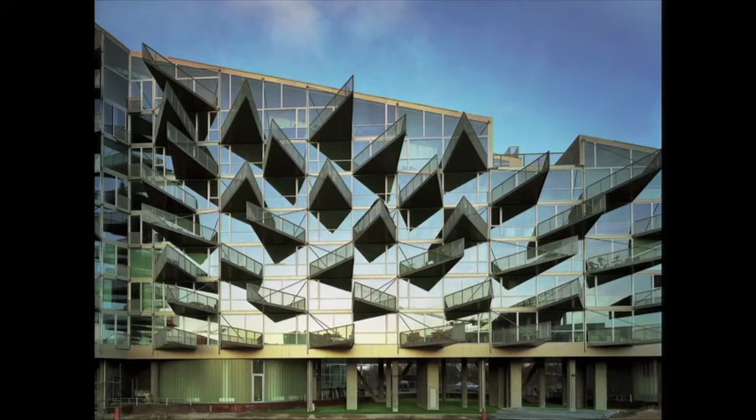The VM houses is the first example of actually cheap housing that we based a lot of our office on for the first couple of years. Then we did the mountains, which was basically this stack of 80 penthouse apartments on top of a parking house. We spent, you could say, the first 6 years since 2001 until '07 constructing quite profane buildings in a Copenhagen context.

Here's the 8 house. And then around 6 years later, we started our office in New York. We moved 4 people to New York to work on a specific project where we found that the distance was too long to do it out of Copenhagen. Then it went quite fast, and now we just turned 200 people in New York.

One of the projects that we started in New York is working for Google, which has now asked us to do their headquarters in London. So now we also have 20 people in London. We just turned 400 here a couple of days ago.

And the New York office, with its 200 people, just finished the first building, which is quite insane, that you are actually working on 50 different projects at the same time as your first building is getting realized. This is testament to that in architecture it's, you could say, a gentleman's sport, an old man's game where you become increasingly better at it the older you get. And a lot of people don't get to build before they turn at least my age.

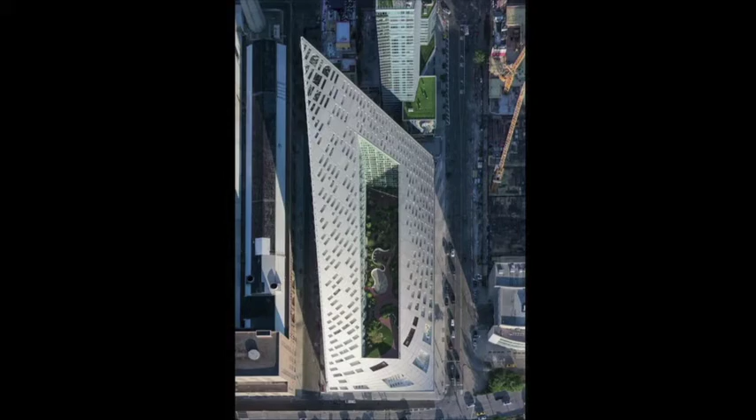So the VIA, or the West 57th, as it was used to be called, is basically a courtyard building where all the apartments have this fantastic view over the courtyard and onto the Hudson River. It's in many ways constructed in the same way as we built in Denmark, out of prefabricated concrete elements, not a steel building like the one we're sitting in. It's probably steel and concrete here, but...

And the second building that is just about to be finished, that we're doing right now, is the complete opposite. It's in Miami. It's also housing, but it's all cast on site because of the cheap labor that comes from Mexico over the borders. In Florida, almost all concrete gets cast on site, which allows you to work with a completely different structural system.

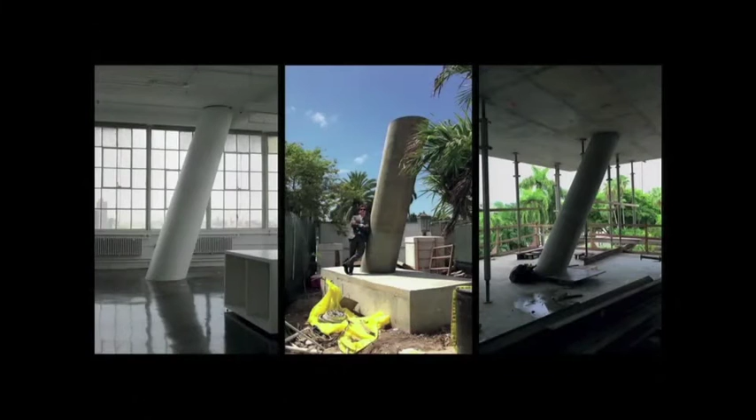Basically, we are working with these twisted, or at least tilting, columns that give a quite unique experience into each apartment. You could say the New York project is basically rental apartments, whereas these are for sale. They're quite big. I think the biggest ones are like 300 square meters, so really large, and the cantilever from the column to the edge...

I don't know if I can walk out here, but... I probably can't. I'm gonna stay here.

...is more than 5 meters. So it's a completely different structural setting than the one that we have been growing up with in Denmark. And speaking of in situ cast concrete, I'm gonna go on to the project that I'm mostly here to talk about, the Maritime Museum.

So the Maritime Museum is basically a transformation project, transforming a city that used to be and has always been a harbor city, a harbor city that has gone through, you could say, two main identities. The first identity was the castle Kronborg, famous for being kind of the home of Hamlet by Shakespeare.

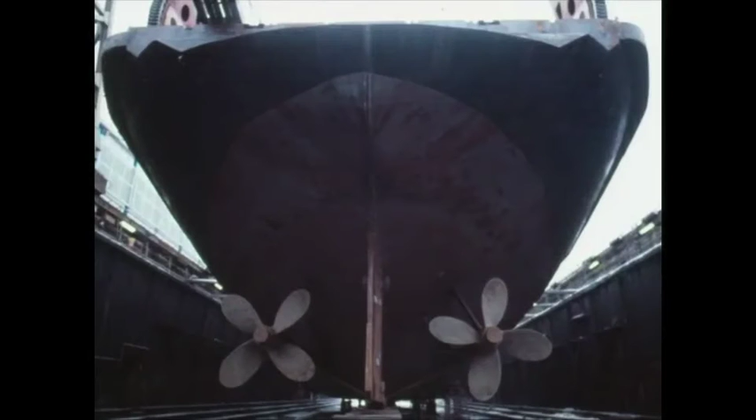It was actually a dock constructed around an older dock. The older dock was made out of granite, and they basically dug around the old dock while they still used it, then built a concrete structure around the old stone dock, and tore it down afterwards, which in many ways resembles what we ended up doing for our proposal for the museum. A lot of famous Danish ships have been built in this wharf and in this particular dock.

But when we came up there, the dock was filled with water. It had actually been filled with water for more than 20 years and had not been emptied, so we had no idea what the state of the concrete and of the dock itself was.

We went for a walk around it and tried to imagine the space we were supposed to create down there. You could say the only people who actually knew how the dock looked were the firemen, because they'd thrown in a couple of cars and put dolls inside them so they could swim down and practice rescuing human beings if they were about to drown inside a car. We didn't have a diver's license or equipment with us, so we had to use our imagination.

And we started working on the competition, reading the brief. Often when you work on competitions, what you do is read the brief very carefully. And what the brief said was that we were not allowed to build as much as a meter out of the dock. We basically had to put the museum inside the dock, put in some skylights, and the reason for that was because it was within Kronborg's 500 meter radius, which was listed by UNESCO.

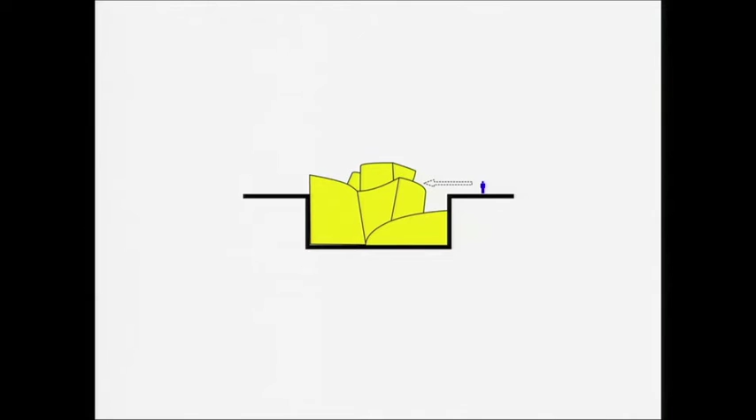After that, the next range of questions that we asked ourselves was, how do we actually preserve the historical dock? One of the things that was very obvious was that the dock was both cold and wet. There was actually water leaking through the walls when you would empty it, because there was just water outside on the other side of the walls, and it was cold. So you had to insulate it in order to use it. And by insulating it, you would take away the texture of the historical dock, leaving it pretty stupid to preserve it in the first place.

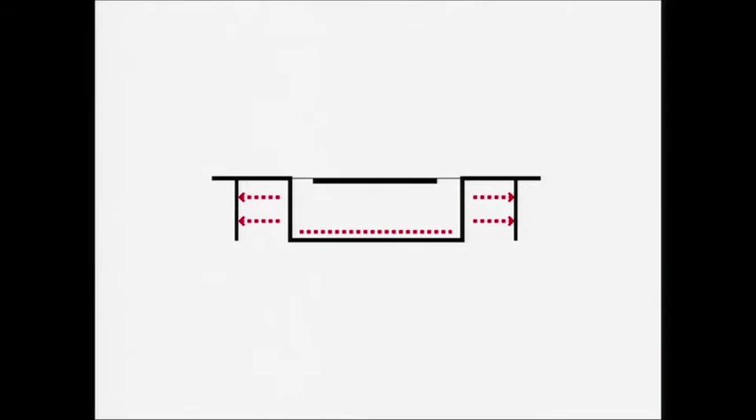So we thought, okay, maybe what we should do was actually to insulate it on the outside. And we discussed it with the engineers and came up with the only plausible solution, which was to hammer down a sheet wall, steel wall around the dock, and then dig it out, pump it dry from water, insulate it on the outside, put in earth anchors to hold the wall back, and then put it in the dirt, and then we could kind of change the surface of the walls on the inside. And we thought maybe that was quite a lot of effort to go through just in order to change the texture of a basement wall, which it basically was.

But then we got the idea of saying, if we anyway have to dig all the way around the museum, why not put the functions out there, liberating the dock from functionality and program, and actually turning the dock into the icon, the hidden underground icon, and in a way preserving the history of the Maritime Museum, the dock itself. So that's how we arrived at the project, that basically you could say took the question that was asked us by the competition organizers, and turned it inside out and just added in 3 bridges.

The first bridge in the middle is called the Kronborg Bridge. It's the main access for all the people going to Kronborg, which is one of the main tourist attractions in Denmark. It has close to 1 million people coming every year. And this was also, you could say, a highway bridge because cars had to pass on it. So it was a quite heavy bridge, and it was defined to be 13 meters wide and exactly placed where it's placed in the local plan, and that couldn't be changed.

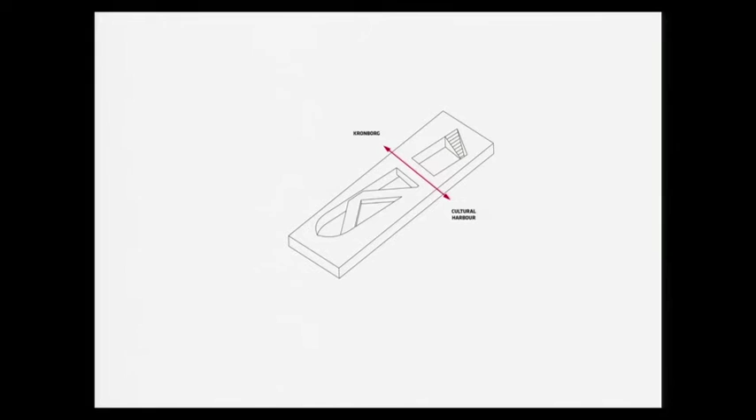The next bridge is the harbor bridge. The harbor bridge is the one that kind of holds the water out of the museum, and at the same time it provides a harbor promenade that is 8 meters wide and a possibility for a fire truck to go out on the bridge, which defines the width on the other side. So that was also completely defined by the local plan.

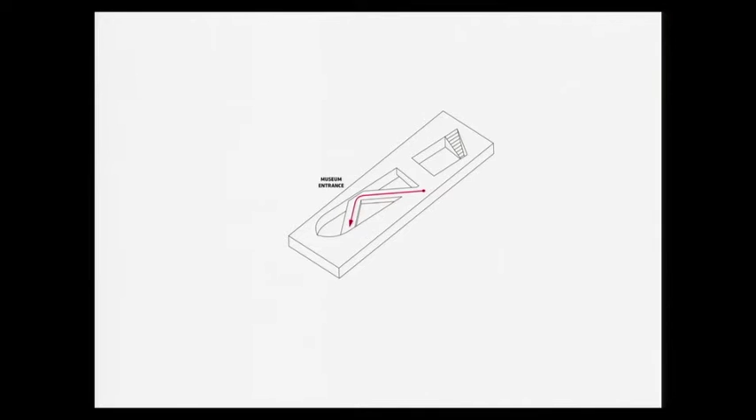The only bridge that we actually added was the main entrance, which we call the zigzag bridge. That had to be 1 to 25 in order to fulfill the Danish regulations for disabled and handicapped people. And there was no room in the dock. It was simply too long. It had to be 80 meters long. So in order to get it down into the dock, we basically had to bend it in the middle and push it down into the dock, which then performs as the main entrance and leads you into the museum.

Underneath all these 3 urban bridges, we then put in the functions that either should be visible from the city by being, for instance, the changing exhibitions, so that they actually become like a vitrine for the exhibitions that change running, or the cafe which needs more daylight and more access to the dock.

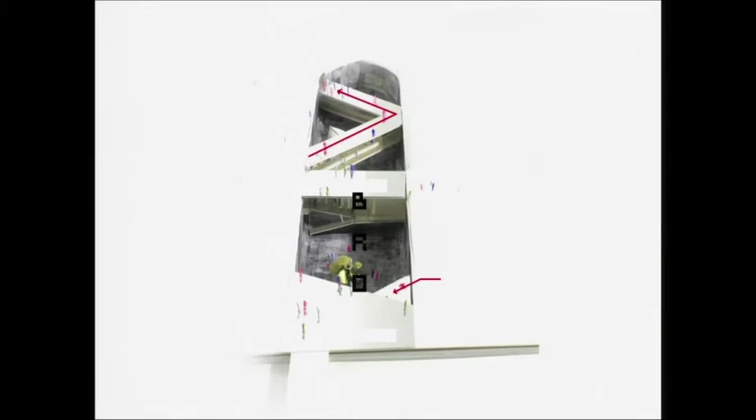When you enter the museum, the rest of the floor is also a tilting surface. It leads you all the way around the dock and down to the level of the bottom, but it's 300 meters long, so it's so shallow that you hardly feel it. It's more like walking on a plain surface that just tilts enough for you to barely recognize it. It more feels like the space just slowly expands.

And you could say, in order not to create 2 long corridors on each side of the museum, we shifted the orientation of the outer white box around the museum, so that the dock is 90 degrees to the shoreline that was there in the industrialization in the 19th century, and our building is 90 degrees to the historical waterfront that was there in the 15th century and the one that's there now.

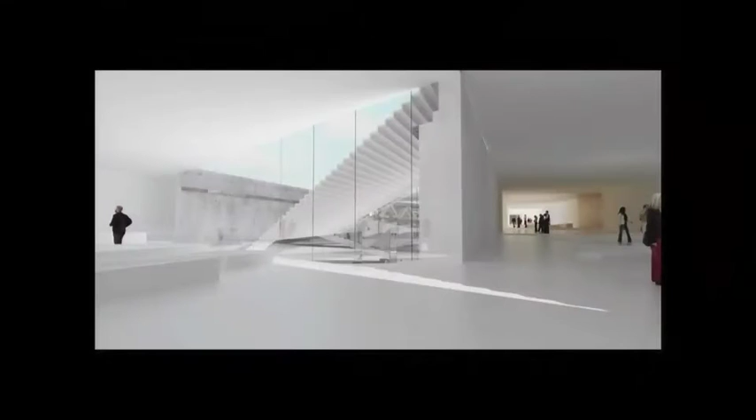So it's basically the inherited discrepancies in the development of the harbor area from different epochs that defines the geometry of the museum and turns it into these expanding spaces. Underneath the first part of the ramp, we added the administration offices for the museum. What you see to the right is a 150 meter long space that becomes more and more narrow.

Back in the 15th century, when architects and painters discovered the art of drawing perspective, they started working with non-parallel walls or columns in order to emphasize the feeling of grandeur for the emperor. When you walked up through the hallway towards him, he would look bigger. And that's exactly what happens here.

So the space that you see to the right almost looks infinitely long, but when you look at it from the other end, it looks less than half as long because the walls are expanding. This helps break up the monotony of walking around the dock, because the space is constantly expanding and contracting as you walk around. When you get to the end, on the level of the bottom of the dock, a big grandiose staircase warps up and leads you back up onto the entry.

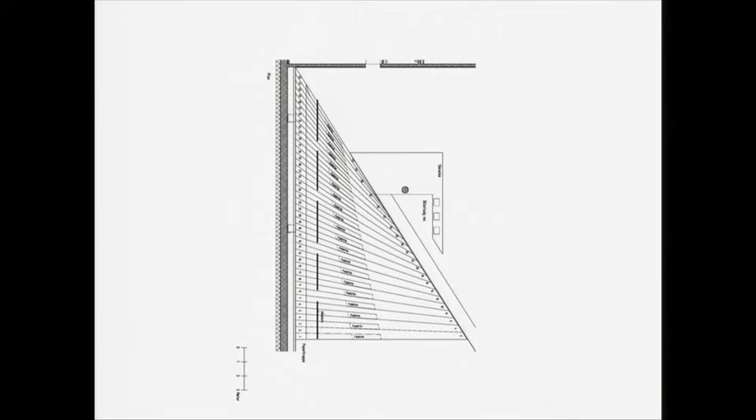Basically, the bottom step follows the bottom floor, and the top step follows the top floor. The top one even tilts in order to meet the ramp, so it actually tilts 1 to 25 to the side, whereas the bottom one is straight, which was quite hard to draw back when you only had 2D drawings. We did this project mostly in 2D.

The steps are made out of concrete as the rest of the floor, and the sides of them out of aluminum as the bridges are.

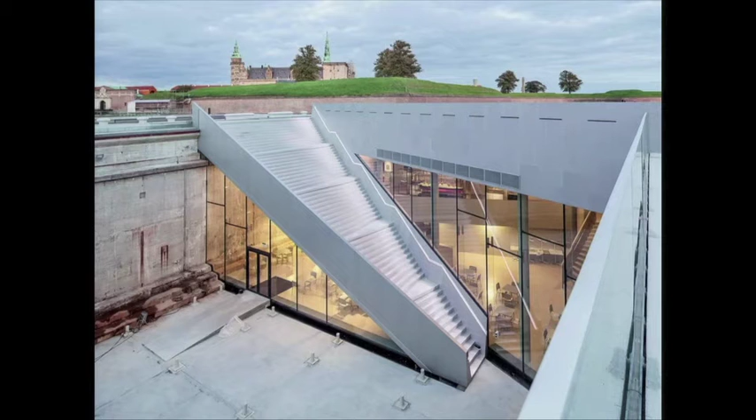This is the cafe, which hosts the other big staircase in the project. This staircase is much more functional because it's actually the fire escape for all the people. If there's a fire, everybody runs out into the dock and then has to run up the staircase. So this staircase needed landings, but the problem was the dock was not wide enough to contain a staircase with landings.

We found out that if we took one of the sides and made straight steps, then on the other side, because it was on the diagonal, that side actually became longer, and there was room for landings there. So basically, the two sides of the staircase have either the fast route up on one side, or the slower route for people that need a break on the way.

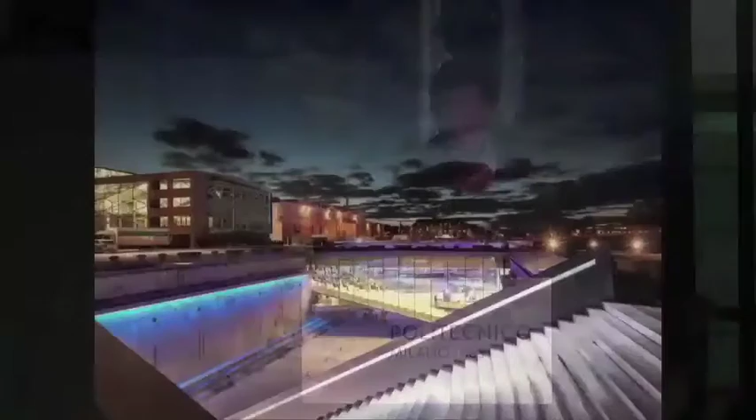There's light integrated into the railings to emphasize the difference between the two sides, but also, of course, to provide light onto the staircase if there's a need for fire escape.

One of the main details of the project is, of course, the cut between the glass and the concrete. The concrete walls are more than 1.5 meters thick, and cutting through them is quite difficult. You have to cut with either diamond wires or big diamond cutters. And the precision of something like that is not as great as you would hope for.

The funny thing is that normally, for us, the precision between the glass and the concrete was the most important part of the entire architectural project. At the same time, the people that normally tear down things in the building industry are kind of the lowest part of the hierarchy.

They basically just put something over their ears and start hammering away. And if you tell them that they have to hit a tolerance of plus minus 5 millimeters, they will look at you, probably smoke a joint, and just go back to work and hammer down everything. So for us to actually carry it through, we had to spend a lot of time on site explaining to some workers that normally don't get the privilege of understanding the architecture of the project they're working on, to make them understand that they were actually our most trusted workers on the site.

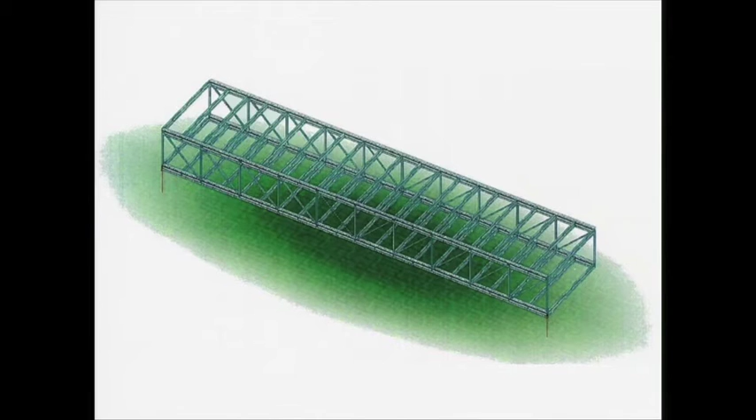You had a completely undisturbed view of the historical setting, instead of a lot of structure in the facade. First, when we started working with the engineers, they came back with a structure that looked like this, which would have completely blocked the view from inside to outside as you walk through the bridges. So we asked them to look at Vierendeel trusses instead, but they just got even bigger.

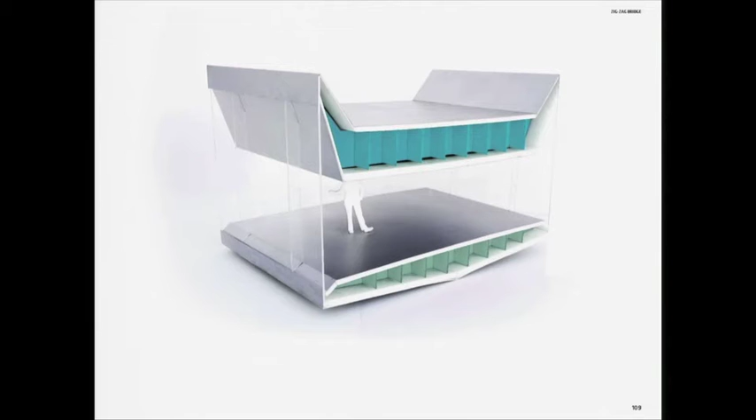But the moment you put on the lid, it's very stable, and that's basically how the entire structure works. On the top part, it's a solid piece of 4 centimeter steel. On the lower parts, it's a solid piece of 2 centimeter steel. In between, it's quite thin, but a lot of ribs actually turn it into this box girder.

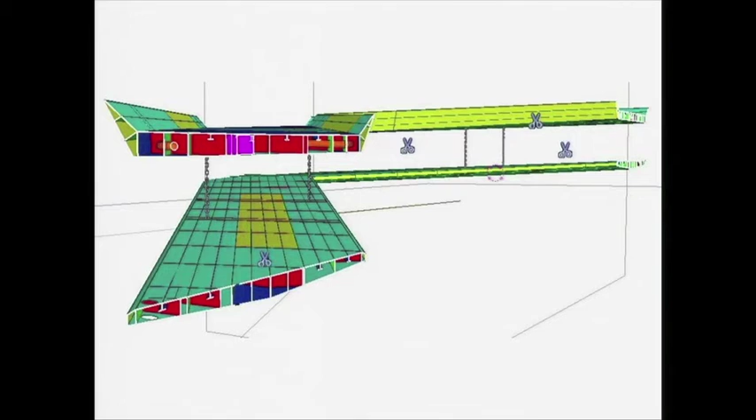Suddenly we were able to span 35 meters. Normally, the thumb rule is that for each 10 meters you span, you need 1 meter of height on the beam, so for 35 meters it would need to be 3.5 meters. We ended up getting the lower bridge down to just 60 centimeters, even though it had to span 35 meters. The top one has help from the 'ears,' basically, that go up on the side.

We call it the Batman bridge, the upper one. And the upper bridge, being a little stronger, helps its younger brother below by hanging it on the central points—basically halving the span, so that the lower bridge only spans 18 meters and 18 meters.

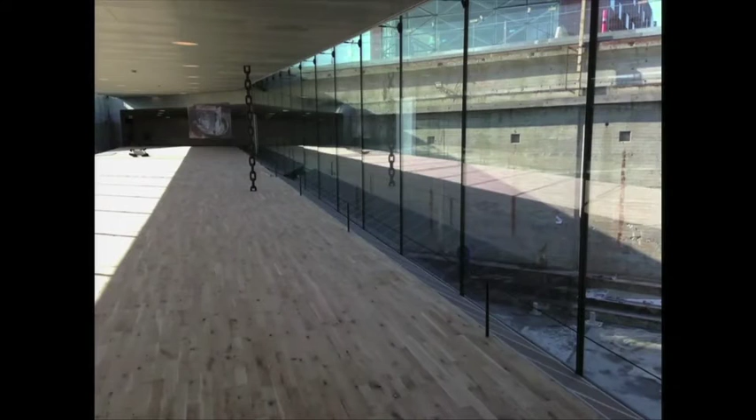This is the finished experience of the building, where you really see both the structure and the chains that we ended up using are very visible in the architecture, but also that you have this fantastic view of the historical dock, and really get an understanding of how it was used—because that's basically why we're doing this project. That's what we're celebrating.

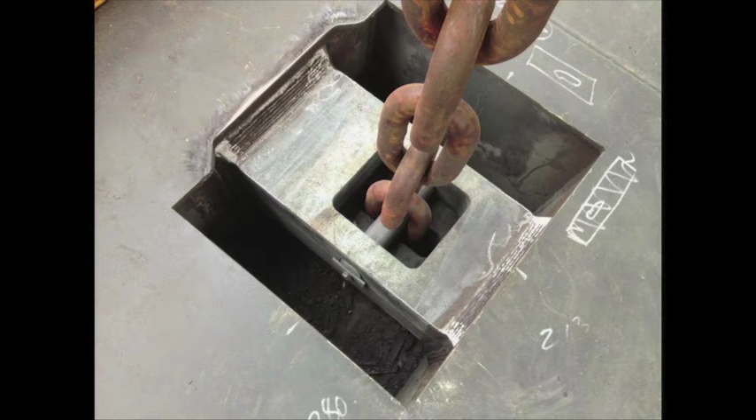The chain is a normal anchor chain from a boat, used instead of a tension rod, but it has the same properties. There are 4 of them hanging between the bridges, and each of the upper and lower bridges is supported on 6 points, whereas only 1 of them is held fixed in place.

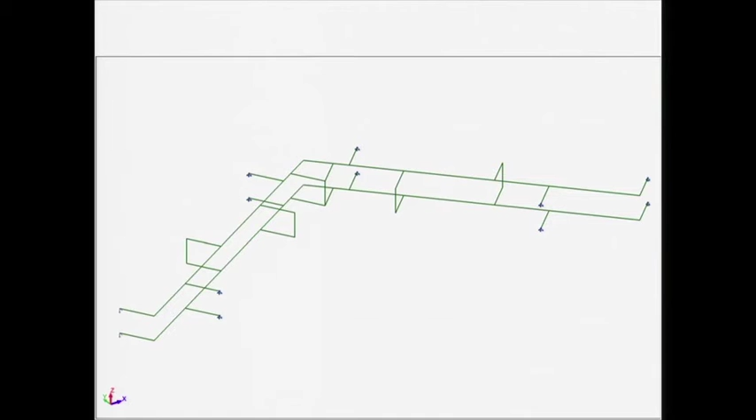The rest lie on joints that can move, which means that when people are walking on them, and when it's hot during the summer, they actually can move quite a lot—up to 10 centimeters, which is a lot when you have a bridge with a glass facade. So there were a lot of tolerances we had to build into the connection between the old concrete dock, which is extremely stiff, and these very soft, flexible bridges.

Inside the box girders, we added all the technical space. As you can see, there's very little insulation on the top and bottom, so it's really minimal, especially for Denmark. You don't use as much insulation down here, but in Denmark normally on a roof you have around 40 centimeters.

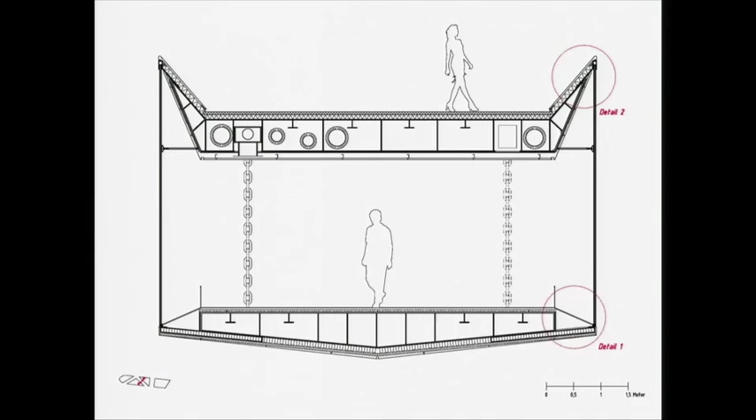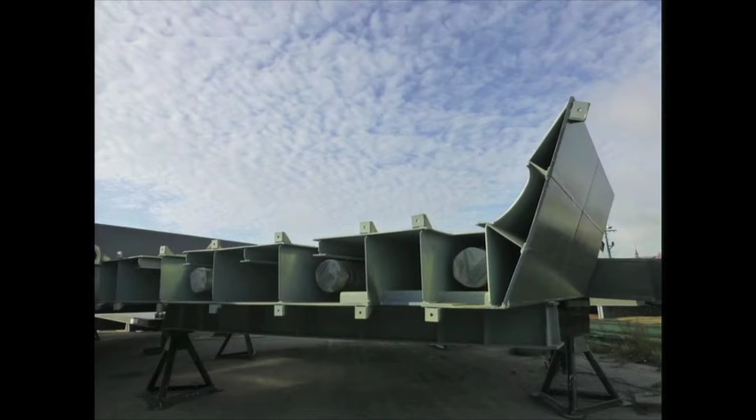But here we used high-grade insulation, so we got it down to about 10-15 centimeters instead. Inside the bridge, it's stuffed with mechanical ventilation, pipes, drainage, and electricity. So it really is a multifunctional steel case that performs both structurally and with all the different MEPs.

That was constructed on a ship wharf in China, which turned out to be the cheapest way of constructing it, and then lifted onto a ship, sailed over the ocean as part of this whole global process of constructing buildings in our time. Each of the pieces that were ready-made from China was up to 100 tons, and then they came to the Helsingør harbor as the biggest ships that had ever docked to the city, and got lifted off and put in place with less than 2 centimeters of tolerance.

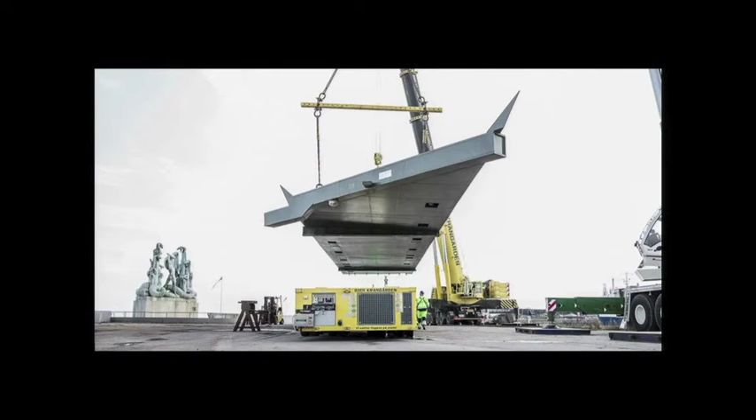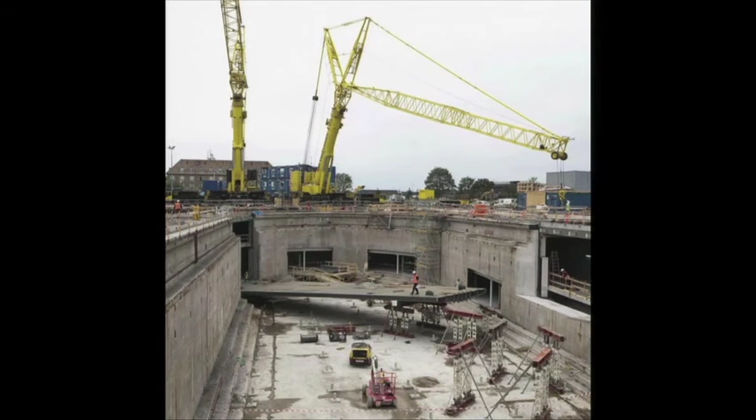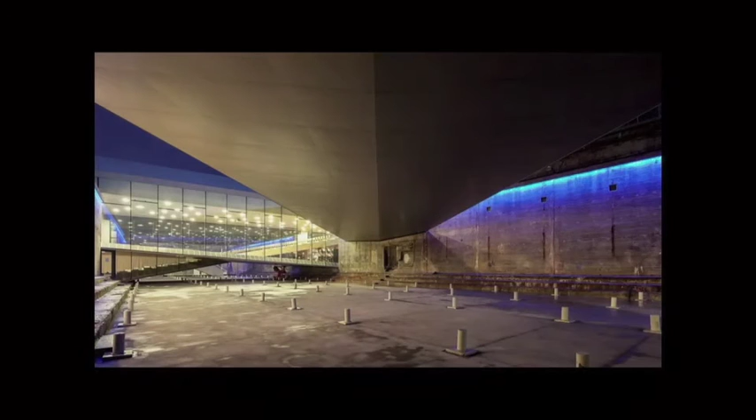So it was a very high-end construction job, and they fitted pretty okay, not as perfectly as we had wished. So we actually ended up doing a 3D scanning of the old dock, which had also moved quite a lot after we started working with it, and the steel, in order for us to do the finishes. So we did a 3D scan of the entire thing before we started cladding it, and had to basically redraw the entire cladding and the entire build-up to fit into the geometry that was needed.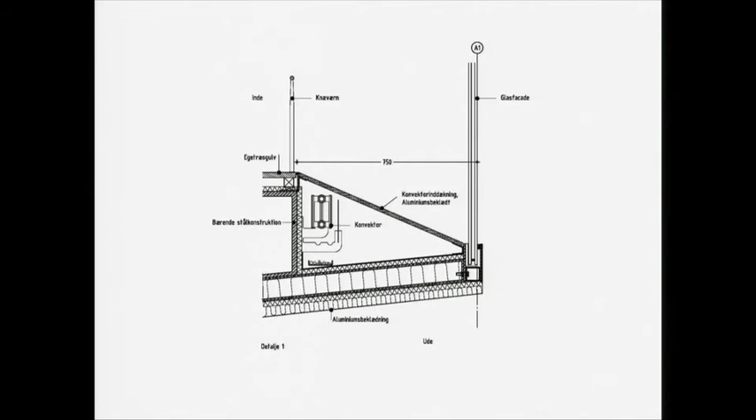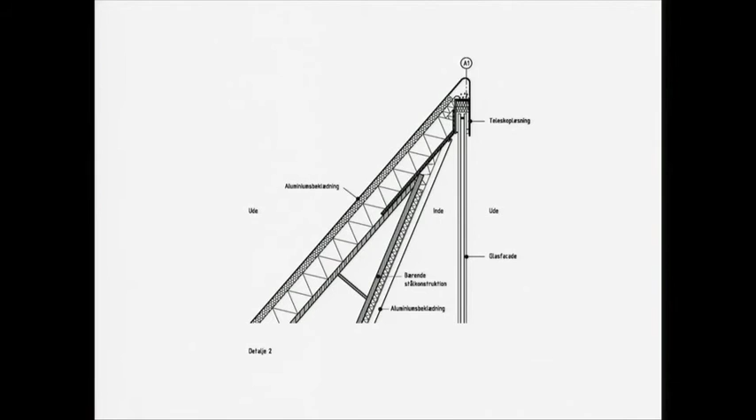But the main thing for us was to keep the edges of the bridges as precise and small as possible. So we really worked on getting the glass almost all the way down to the bottom of the steel. Basically, the construction steel stopped about 750 millimeters from the facade, and from then on it was just a small steel pin that holds the glass. On the top it goes up, but because of the dilatation and movement of the bridges, the glass can move up and down 10 centimeters, which is also a big part of the technical solution.

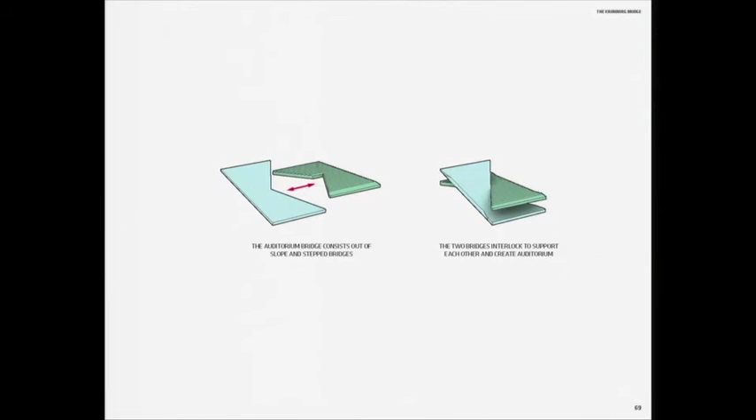The next bridge I'm going to talk about is the Kronborg Bridge. The Kronborg Bridge is what we call it at the top, where it's a concrete bridge, because that's a highway bridge where big cars go. Then we have the two lower bridges, which we call the Auditorium staircase and the museum ramp. Those two bridges are basically the entire width of 13 meters at each end, but then they pull back in order to allow the other bridge to go around it, and then interlock, forming an arch.

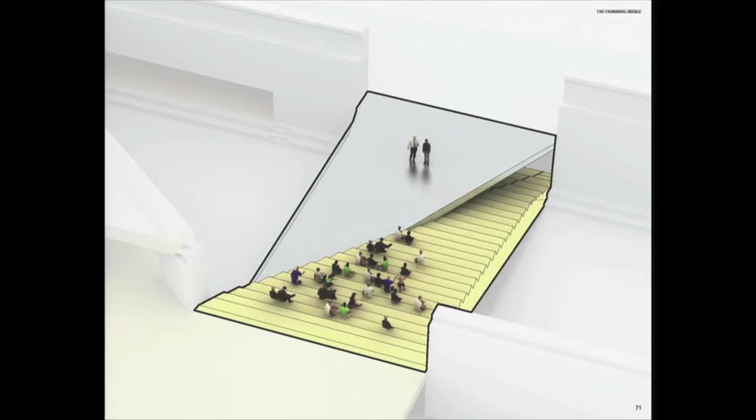And basically they support each other. So instead of it being one plane that is very soft in the middle, they actually interlock and become much more stiff. This made it possible to get the steel down to between 20 and 40 centimeters in the construction. One of them is used for the auditorium, and the other is a shortcut from one side of the museum to the other.

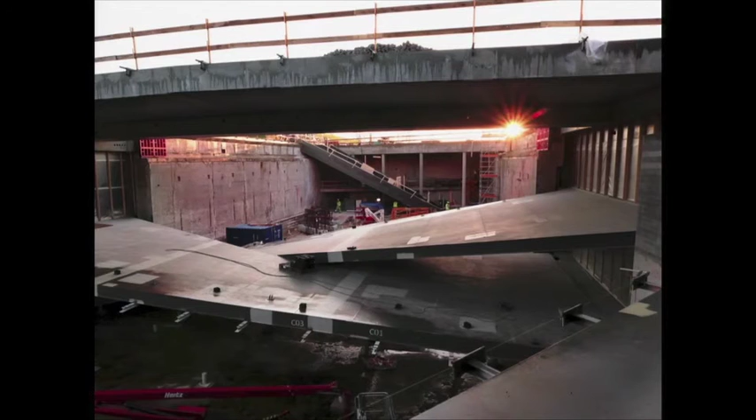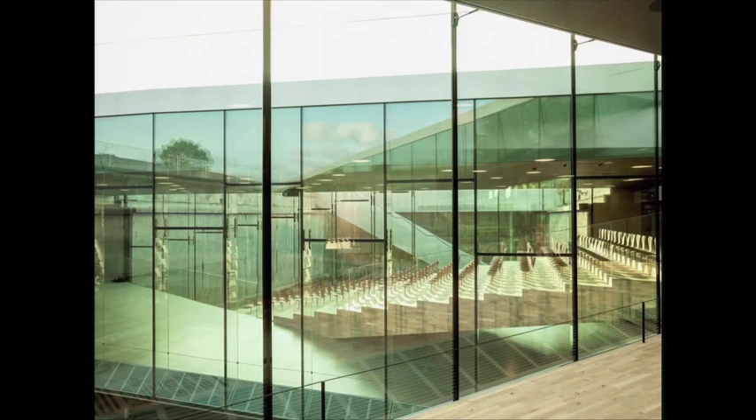Here you see the technical drawings of it, and here in their most pure form, you can really experience that it is actually two different structural systems, but almost three different independent bridges that span the dock, which really helps create a space that is very transparent and where you really feel the length of the dock. The dock is 150 meters long, 20 meters wide, and 8 meters tall, and in that way it's probably the biggest exhibition piece in any museum in the world, because it's actually exhibited within the museum.

The auditorium is capable of holding around 150 people, and the bridge for the shortcut is actually used a lot by children to play on, just as a kind of informal playground.

This is, let me see if I can start it.

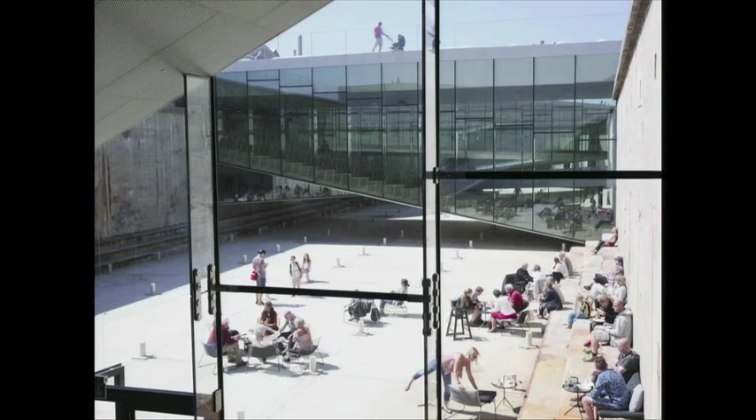This is a typical day at the Maritime Museum, where it's filled with life. Actually, the parts of the museum that are not programmed are often the most lively ones, both here on the inside, but also the dock is quite filled with people. There's hardly any wind down there because of the shelter of the walls around it, and it's used by the cafe for outdoor serving.

But it's also used for events during the year, operas, theater shows, where it can be enjoyed both from putting up chairs in the dock itself, but also from the edge of the dock on a normal day where people are just enjoying the dock itself. But on big event days, people actually gather all the way around the museum in the urban landscape, on the ground floor and on top, to see what happens within the dock. So it has actually become this almost sunken square in the middle of the city, filled with life at different times.

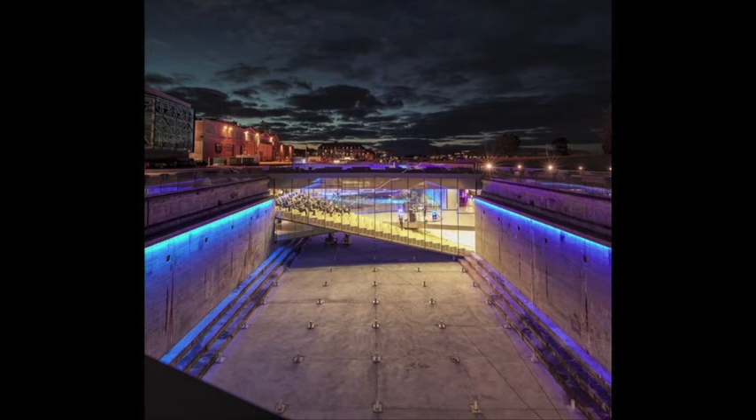The section of the bridge looks like this, and as you can see, the detail at the top is also something we worked on quite a lot to make as minimal as possible. It's actually quite thick, and it has the same detail at the bottom as the other steel bridges did. It was important to us that even the reflection in the glass is part of making the dock look like it's continuing through the bridges, really forming this old frame for the life in the dock, and preserving the experience of the historical dock.

I would say, to me personally, the experience of walking underneath the bridges is probably the most powerful architectural experience in the project.

The last place where we also wanted to have a very minimal cut between the glass and the concrete was the glass we put in for the administration below the ramp. There the detail was very different - not a detail in section, but more detail in plan, with the same principles. Because the wall is 160 deep, and has insulation on the back side, it actually ends up being more than 2 meters deep. We wanted the concrete and the glass to meet perfectly on the edge, so the insulation kind of tapers off as it comes towards the facade.

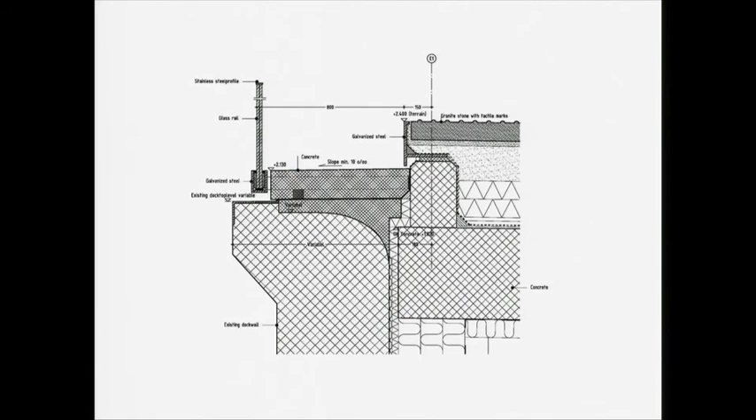So we did two things to minimize the impact of the railing. First, we kept the height of the railing from the historical dock, so we kept it down. We had to raise the surrounding urban space to protect from flooding - at least in Denmark, the flooding requirements are that it needs to be 2.4 meters above normal sea level, whereas historically when the dock was constructed, you only had 1.8 meters. So the 60 centimeters is used as a step down, which makes the railing look lower, so that when you are walking around, the dock disappears even more.

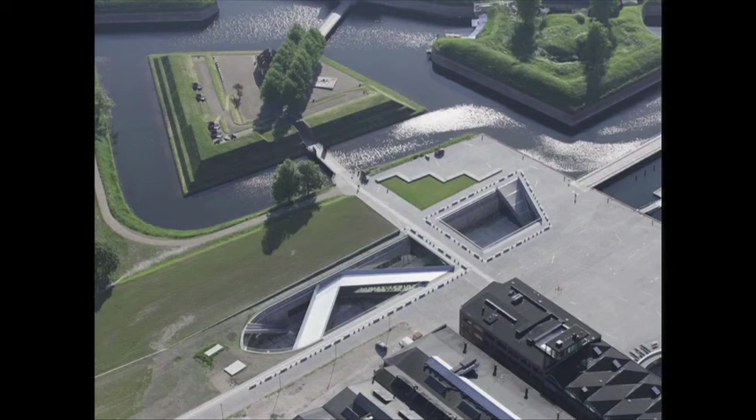Then, as another trick to make it disappear, we decided to separate the railing that should stop the cars from the railing that should stop the people. The railing that stops the cars are these fenders - artificial fenders shaped a bit like the historical fenders you connect your ship to - that are also benches and chairs. Then we started playing with how to organize them around the dock until one day we realized that, since we now had a chair and a bench, we could actually use it as Morse code. So around one of the holes it says 'M S Museum for Maritime,' and on the other, it's a quote from Hans Christian Andersen, the famous Danish poet, who says, 'to travel is to live.'

So when you get there with your kids, you can go down into the reception and get the Morse alphabet, go upstairs, and practice part of what it is to be a sailor - which is to be able to write and make yourself understood in Morse code.

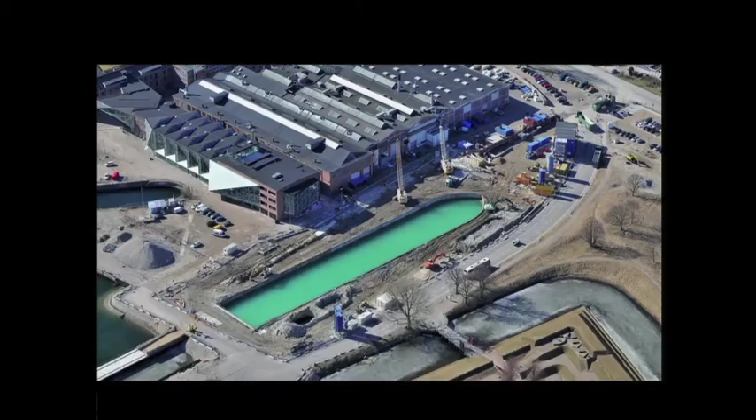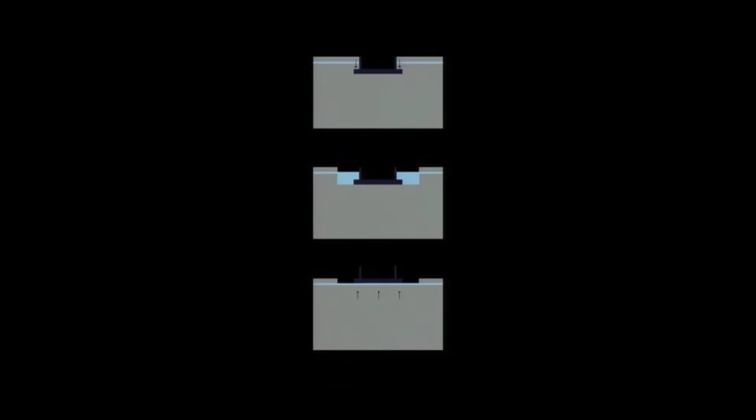But of course, the most difficult part of the project, seen from the engineering side, was that it was filled with water. There's a harbor right out on the other side, and you had to dig around it. We found that the dock floor, which is 2.5 meters thick, had to continue 5 meters out beyond the walls in order to be heavy enough to hold the dock down, with the earth on top holding it in place. So the moment we started digging around, the dock would pop out of the water and lift 4 meters out of the ground. So we had to anchor it in before we could start digging.

The problem was that to anchor it in, we had to pump away the water, because otherwise, the moment you drill through the concrete, you'd get an 8-meter tall fountain of water you'd have to drill against, which is impossible. So the first idea was to just pump away the water. The problem is the harbor is so close that around 20% of the entire building budget would be used just for the energy of pumping. So that was hardly a good idea.

And the second problem was that it was so close to Kronborg that Kronborg would probably start getting settlement damages, which would definitely not be the best commercial start for a new museum.

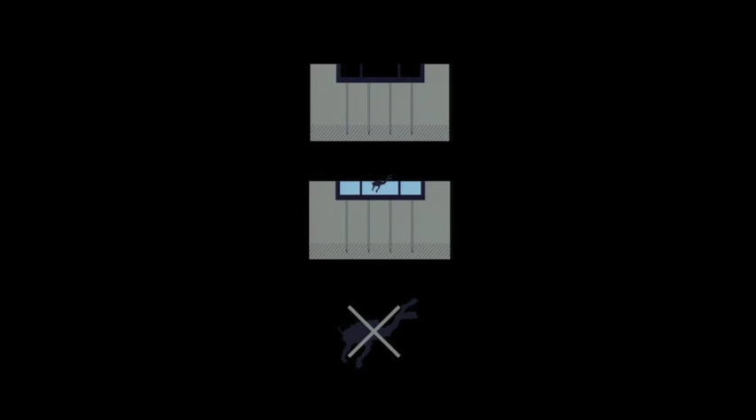So the engineers came up with this ingenious idea of sending down divers and drilling holes through the concrete floors underneath 8 meters of water, which we thought sounded a little like building Atlantis. It was actually not the architect but the engineer who thought that was the best way. Then we tendered it out, and all the contractors came back and said they weren't going to do it—or they could do it, but wouldn't be liable if water started leaking in.

So each of them came back with different solutions. The one we ended up doing was basically a 30-meter deep wall around the museum that goes into the chalk and makes the construction pit impenetrable from water. It's done using bentonite—it's called a slurry wall. It's what you normally do to make metros when working in historical areas.

Each of these big grabs are about 10 meters tall, roughly as tall as this space, and 4 meters wide, but only 60 centimeters deep. They dig these narrow walls all the way around, and you pour in bentonite, a very thin concrete that acts like clay, which water cannot penetrate through. So that's basically what we did.

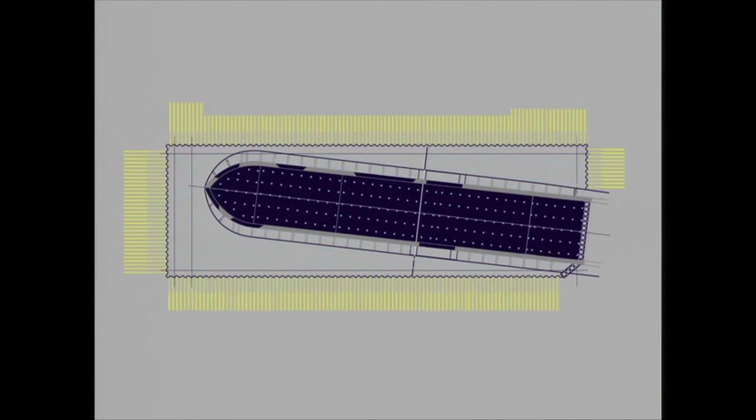Then we could pump out the water, and then anchor in the dock. This is a drawing of all the horizontal anchors—there are 466 anchors going down to the chalk. But that was the cheapest way of doing it, instead of using divers.

And then we decided to leave the earth anchors visible in the dock as a testament to the effort spent preserving it. All these earth anchors are what you see the caps on top of here in the dock. And this is how the excavation site looked. It felt more like being an archaeologist than an architect, until the day it was finally done.

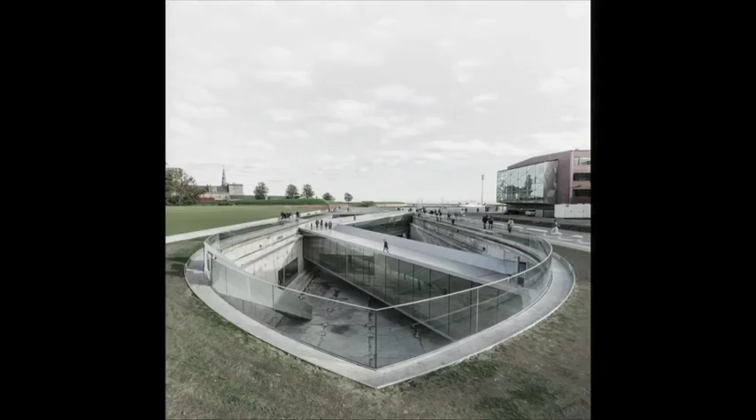As a last thing, I'm just going to show a little film. Can somebody turn up the sound?